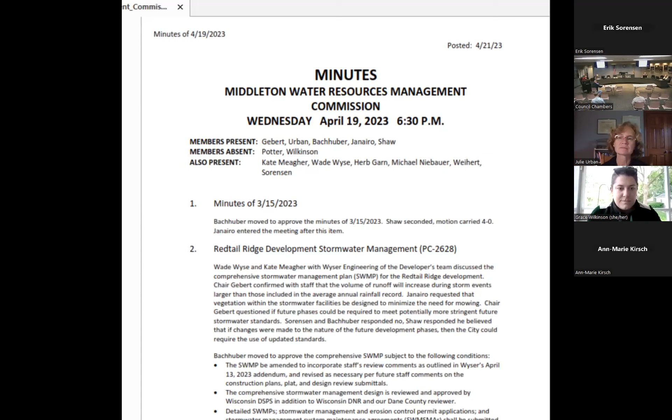The first item of business is the Rockridge Development Stormwater Management and a request for fees in lieu of. So Erik, you want to start an introduction?

Yeah, I'll give a brief introduction. This site is off of Pleasant View Road across from the golf course. Water Resources looked at it a couple of years ago for a different project, and then last April the developer came with a concept plan that you reviewed. The complicating factor with this site is that it's sitting on rock ledge. Water Resources had previously directed a diversion to Pleasant View Road and to not infiltrate into this sandstone bedrock. We did check with the designers for Pleasant View if the diversion would work with their storm sewer system, and they didn't see any negative impacts really at all, so we didn't have to upsize any sewer or the downstream pond for that.

Is your mic on, Erik? I have a hard time hearing you. Is that better, Warren? I don't think it's on. I can hear him, it's on, okay, it's not loud. Is this one better? No. We're having a hard time here. I'm not sure that it broadcasts up here. It may not. Well, it ought to be working, but what I'm most worried about is that the remote listeners can hear. You're coming through well remotely. All right, I'll just talk louder, or try to. Somebody's perhaps got a mic on. It's me.

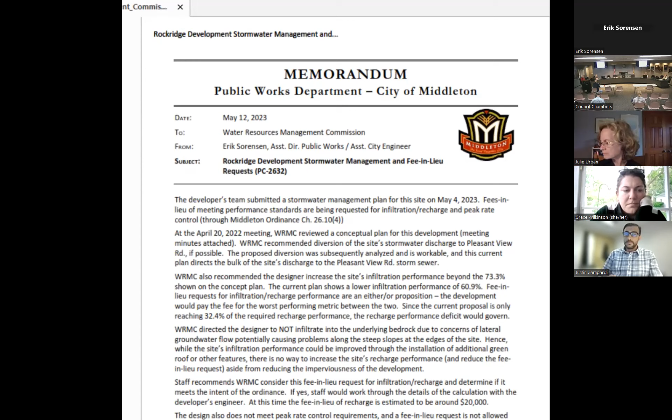Justin Zampardi from Vierbicher is here, and he can present this plan, I think, and talk about what's changed a little bit and what his constraints are with the design.

Good evening, Justin Zampardi with Vierbicher. Am I able to share my screen with you? You can give me 1 minute. Ken's here. Oh, you can. All right, Justin, you should be able to share.

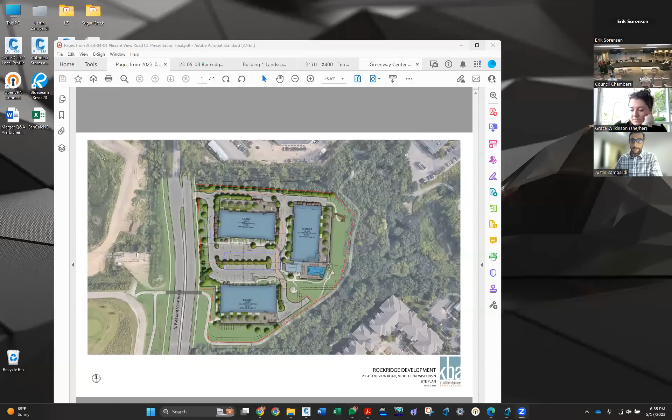Hopefully everyone can see the colored site plan on the screen. So overall, the layout is very similar to what we had before. We've got 3 buildings on the site, each with underground parking, and the underground parking actually extends out beyond the actual building footprint, so that's where we're planning to do our green roof area. In regards to our site layout, we've got one large underground stormwater management system in the middle of the site under the parking lot that's treating the majority of the site, and then we have a secondary system toward the front entrance picking up a lot of the perimeter drive along the north and west sides of the property.

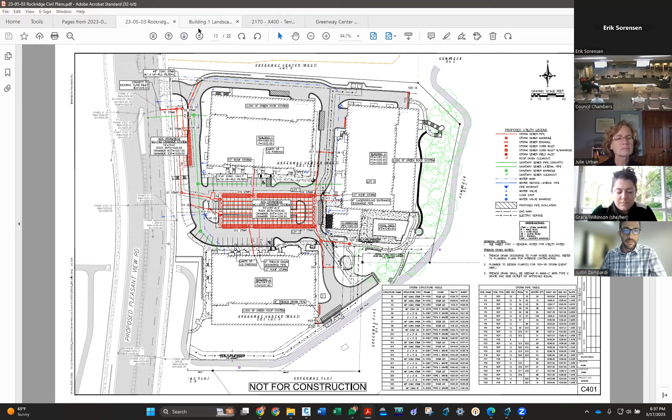Some of the reasoning for the decrease from our concept layout is really just further design of the buildings going through our approval process. I do have a typical rooftop area highlighting some of the green roof areas we're showing because of the width of the building and the area. There were some building code issues requiring us to provide a secondary access off of these areas, which is why we had to reduce some of the green roof area footprint in order to get an access out off the upper patio space area.

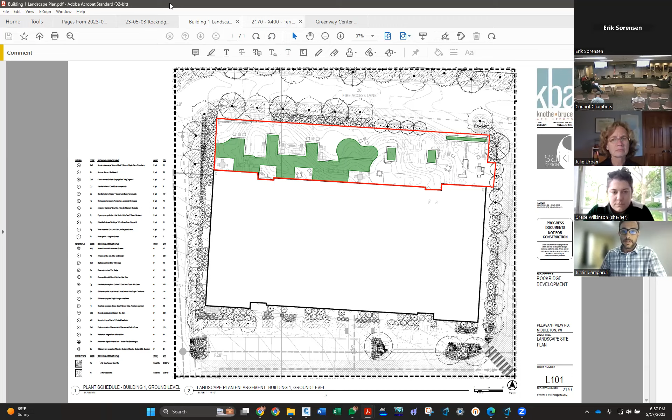As Erik mentioned, our site is approximately 5 acres. With the diversion, we're capturing around 3.9 acres of runoff and directing that into the proposed storm sewer in Pleasant View Road. The areas running off-site around the perimeter, hatched in red, are the steep slopes, existing steep slopes around the perimeter that just aren't feasible to capture. All those areas are primarily green space. With that, I'll leave it up for any comments or questions you may have.

One question on infiltration - you didn't try to make any attempt at infiltration. The previous site we talked about was a single building in the center, and they had an infiltration basin off towards the north, close to that sheer wall. That's the one we thought might present some problems, but this is a different configuration, and it looks like you made no attempt to do any infiltration. I really think you should at least show us some infiltration potential before we make a decision.

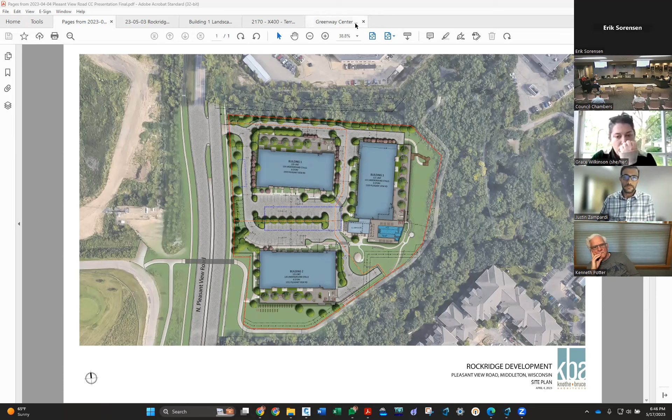And on the peak flow issue, I'm not understanding that. I didn't delve into this terribly deeply, but on top of page 13 of the report is a peak flow post-development summary table.

What we were trying to show in this table is the captured area that we highlighted in that report was 3.89 acres, and our post-developed flows running through our stormwater facilities are essentially meeting the pre-developed rates for that captured area.

What the rest of the table is showing is that for the perimeter around that area, which we're not able to capture, that is this 'no controls' column. And if you were to just strictly look at the 5 acres in total from pre to post, the table is showing that we're not meeting that.

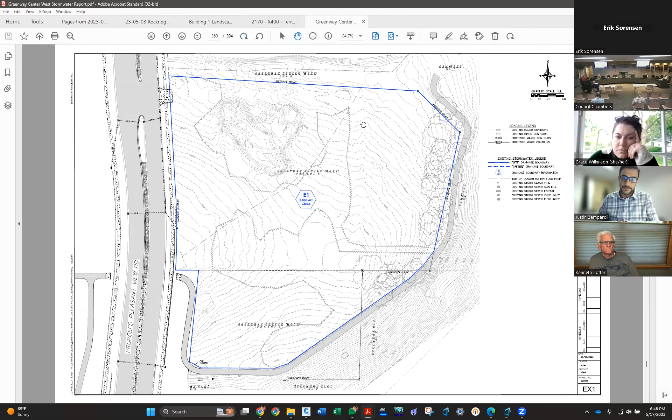That really ends up being a time of concentration issue, and just the peaks of the storm are different when you look at the map for the whole site. This has a longer time of concentration running off as opposed to the same grass area that has a shorter length. So it shows an increase in flow, even though it's the same pervious grassed area.

So really, we were kind of looking at it from the standpoint of the area that we can capture, this roughly 4 acres, we're running it through the stormwater system, and we're matching or reducing peak flows on that.

And then the green space perimeter is running off undetained. And really, this 4 acres is also a diversion from what is currently going down the hill offsite to neighboring parcels, being reduced down to roughly 1 acre.

Erik, when this water that's going into the new Pleasant View system, that's going to then flow north to Highway 14 in a storm sewer? Do you know where it goes from there? It flows north to Quarry Road, and the Pleasant View project is building a new basin on part of the co-op property, just upstream of South Pond. Oh, so it'll go through there, then to South Pond. Okay, so it goes into South Pond eventually.

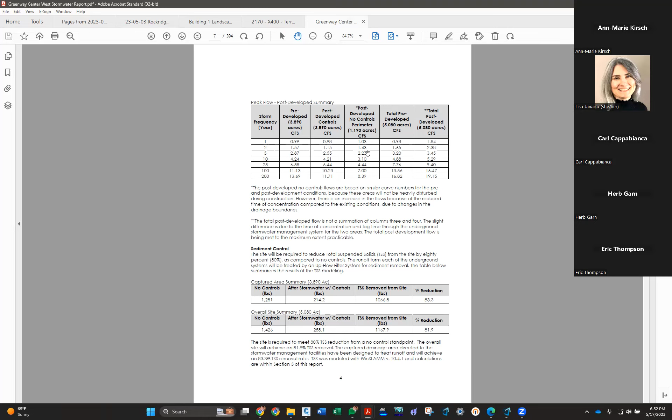So the motion would be to request the developer to submit plans to DSPS for infiltration on the site, and also that they reanalyze the system to meet the peak flow requirements from the entire site, not just the currently treated site. That would make sense to me.

I guess before we continue, I believe we had the same discussion last meeting, and I think ultimately we came to the resolution that infiltration was not good for this site, and that's why we're seeking the exemption. So I'm curious why we're going back on what we already decided. I don't think so, because I've raised the same concerns before. Our only approval was on the previous design, and your design is different. So I raised the concerns about infiltration last time.

I think I must have misinterpreted that too then, Warren. I thought Water Resources had said no infiltration, not just no infiltration at the northeast corner. Is Ken having a thought on this? 'Cause I know Ken was involved with that discussion also.

Yeah, I think we need to get some infiltration, but you share the concern not along the perimeter areas. Is that what we're trying to say? Yeah.

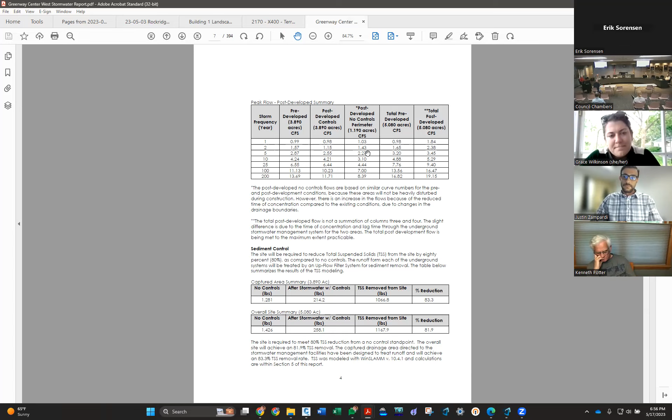Well, at least then we know for sure. Yeah, but you're making these guys do stuff that's not gonna get us anywhere.

The previous one was ready to go ahead with infiltration, except for being close to the cliff with lateral flow. So I don't understand what the difference was from their design versus this one. The only reason we said we're concerned about it is the basin was located near that cliff and they're worried about lateral flow, and we don't know what design they may come up with here. All right.

If the commission wants to vote to do that, that's fine. I'll just be a minority vote then. That's all right, I can live with that.

So you withdraw the motion you started to make then? I can still vote against my own motion, I guess, can't I? Sure, yeah, someone's got to make the motion. I could do the motion in my name with your wording that you had. All right, go for it.

Can you capture that wording again, Eric? Motion is to deny the request for peak rate control fees in lieu and to defer a decision on infiltration fees in lieu until the developer comes back with an answer from DSPS. They should make an attempt to do infiltration where they can. It may not be able to be done for the whole site, but maybe at least partially.

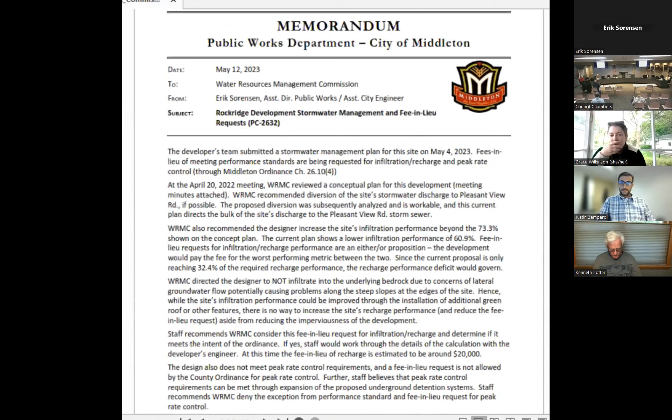Well, we have a motion right now. Is there a second? I'll second. Okay, we have a motion on the table. Is there any further discussion or clarification that's needed? I would like to propose that if we don't vote this to approve, that we would separate out the two issues and vote on the peak flow versus the infiltration issue separately. But you got to second it, so you got to take a vote.

Okay, all in favor of the motion, say aye. Aye, aye, aye. So that's 2 in favor, opposed? Nay, nay, nay. Okay, so the motion fails. You want to try and separate them?

So the first motion is to read the first part again, Eric: to reject the peak flow fee in lieu of request. Yes, that's about what it is, right? So that's my motion. Second. Is there any further discussion or clarification needed? If not, all in favor? Aye, aye. Opposed? Aye, aye.

What was the count? 3 and 2. I'm not sure how Ken voted. I'll support it, yeah. Was that Herb that voted no remotely? No, I voted in favor. Oh, okay. I also voted in favor. So that's 5-1 is what I get. Okay.

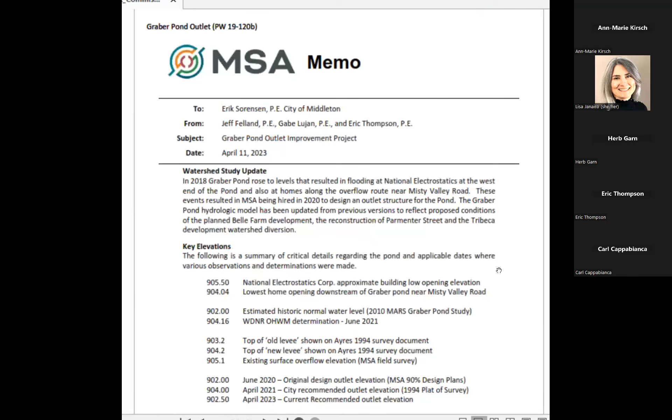Good evening, everyone. As Eric said, I'm Jeff Felland from MSA. I'm here to provide an update on the Graber Pond Outlet design project.

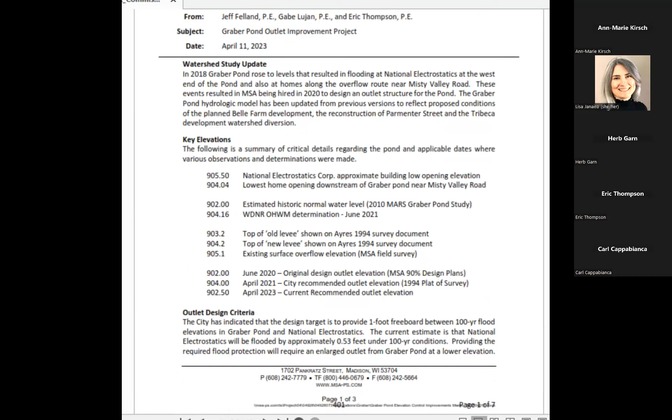Eric provided a brief background of where we've arrived at today. The latest memo, or bit of work that we did and wrote up a memo for, as Eric mentioned, was to look to create the freeboard at National Electrostatics, and then also at the houses along the overflow path from the pond upstream of the Misty Valley Road culvert crossing.

One important thing to note in this process is that back in June of 2021, DNR set the ordinary high water mark at 904.16 — that's the elevation they determined the ordinary high water to be at.

So in this last round of work, we were modeling under the boundary condition of having that Graber Pond starting water surface elevation equal to the proposed outlet elevation of a structure.

The other things incorporated in this last effort were some updating of our model based on the proposed Belle Farm development, the proposed reconstruction of Parmenter Street, and then a diversion of an area referred to as Tribeca that would now go to a regional pond versus going to Graber Pond. So those were the conditions that changed from the last round of modeling.

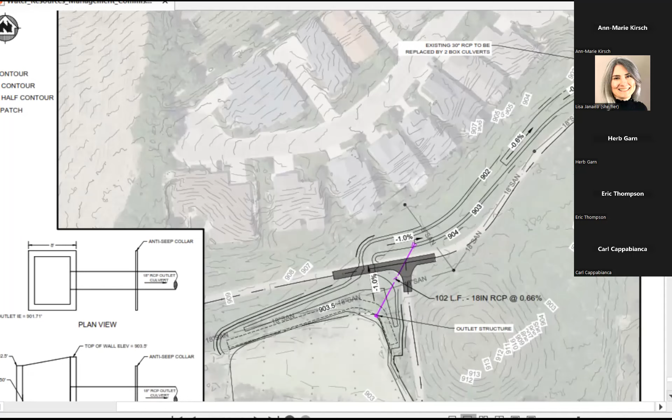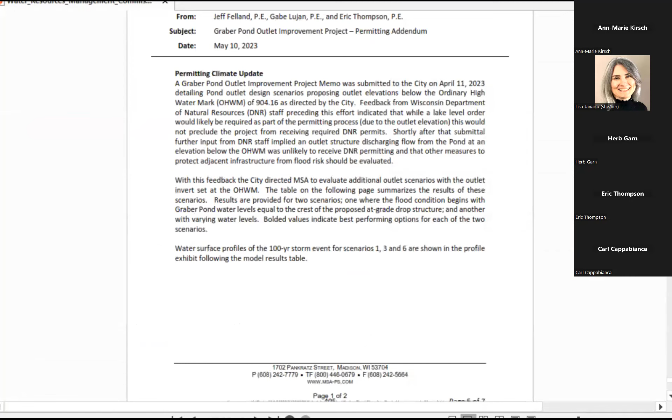After that process, DNR came back, upon some further nudging, to try to get a little more clarity on what the permitting requirements would be. They provided a challenging scenario for permitting an outlet structure with an invert elevation set below that ordinary high water mark.

So the discussion went from a lake level order likely being needed as part of this individual permit process for a structure below the ordinary high water mark, to the DNR saying they don't think a lake level order is the proper mechanism to evaluate this permitting application, and instead a public rights stage investigation would be more appropriate.

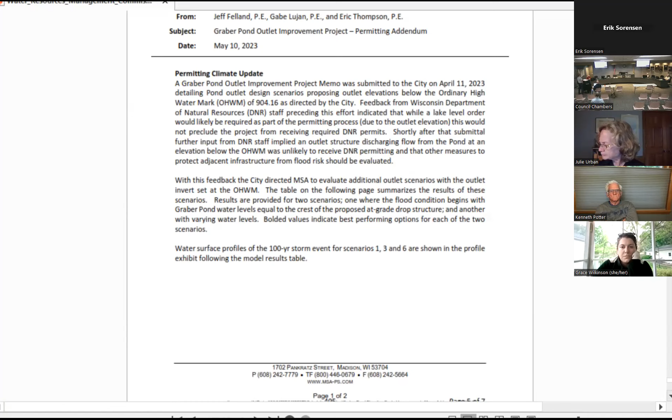Further input was that DNR traditionally has not allowed outlet structure invert elevations below an ordinary high water mark in natural or public water resources, i.e. Graber Pond or similar kettles. So this last round of input from the DNR regarding permitting doesn't paint a very great picture for the chances of a permit application for a project that proposes lowering the outlet from Graber Pond.

Is there a question or comment? Just to boil this down, because it's a complicated situation for sure, and I don't follow all this stuff either: if we were allowed to lower it below 904.16, we would then buy ourselves some storage to be able to mitigate, under some conditions, downstream high flow impacts. Is that right, or am I not getting this?

Lowering the elevation gets you some freeboard at National Electrostatics, but also dumps more water out of the pond sooner and potentially creates flood risk for the homes along Misty Valley. You could have a couple of feet worth of storage above that lower level, with a control structure that would store water temporarily behind a weir, but then you're going to put National Electrostatics at risk.

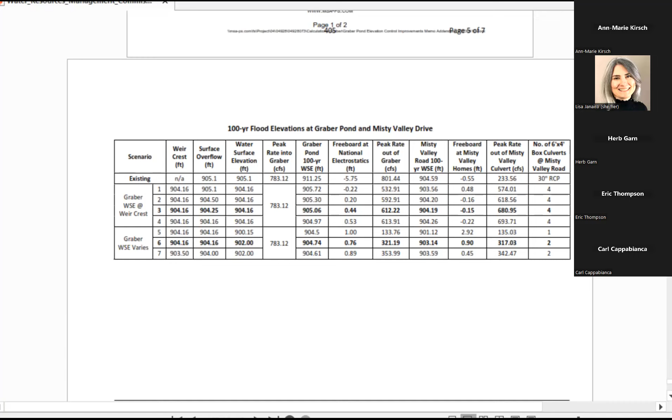That seems to be the sentiment conveyed from the DNR based on past precedent, even though this was a pond that at one time went dry—it's a kettle pond. I had the last correspondence with DNR permit staff, and the question I asked was, doesn't the historical manipulation of the outlet matter? He basically said no, but at this point I'm not certain I'm speaking with the right staff, or whether I should take the conversation up one or two levels higher.

Their reason for the 904 elevation is to preserve the wetland adjacent to it, to keep the water level up and protect that public resource. That's where they set the ordinary high water mark, based on the last couple of years before 2021 that were so wet, when it flooded and overtopped. I wouldn't call that the ordinary high water mark, but it is a high water mark.

I think it'll change over time, and that's what I'm trying to get across to them—that it's been fluctuating over time, perhaps through some bad decisions, and we've allowed it to lift up. At least that's the research I've found since I came to the city and started looking through the old files.

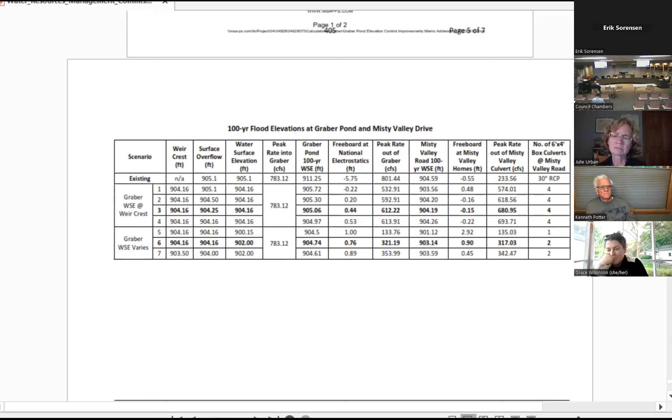Will this require an amendment? Put you on the spot. Well, I don't know that. I think we have probably all the information we would need to present a case or to further the discussion with the DNR.

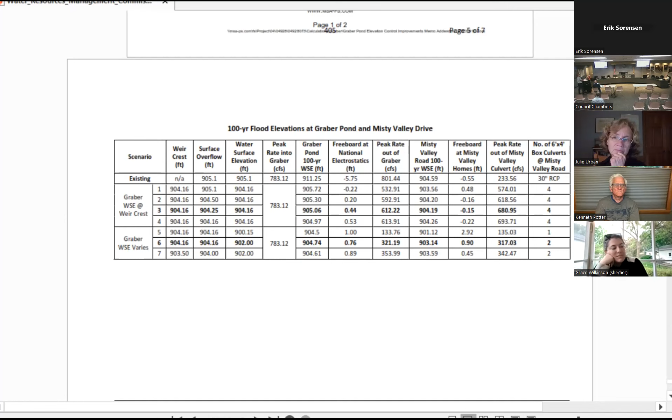You have budget to carry on right now, and this is part of your budget scope, although it's expanding now. There is some, I don't know exactly where the budget stands, but I know there's some remaining funds under this last amendment. I can look at that and get back to Eric, but I think there would be minimal effort from a modeling standpoint to come up with a couple more scenarios to present to the DNR if they were interested, but I really think the bulk of the effort at this point is in conversation and discussion with the DNR.

And maybe trying to flesh out a little bit more detailed history of the pond, and the manipulation or past historic manipulation of the pond outlet. I don't know how far you've gone with that information on historic conditions and elevations that were existing, and what the pond level is when it dries up — those kinds of numbers, if that would have any sway with our friends downtown, or Fitchburg, I guess.

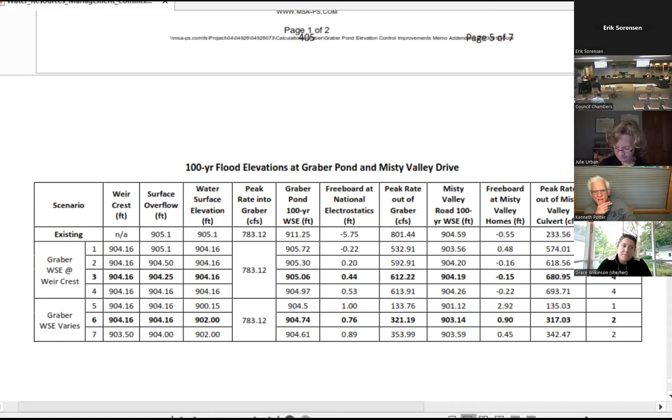Yeah, the way it was phrased to me is they set the ordinary high water. If we propose an outlet below that, you're reducing or lowering or shrinking the public resource. That fringe is no longer there, and that's where they got hung up — even though that public resource was only that high during maybe a 3-year period.

So if we do lower it, does it then become a dam, a storage reservoir? Is that different criteria? I don't think so. A few years ago, we did get a determination from DNR that it was not a dam. I don't see how it would become one if we lowered the water elevation, because certainly it's not built as a dam for retaining water — essentially dirt just dropped there.

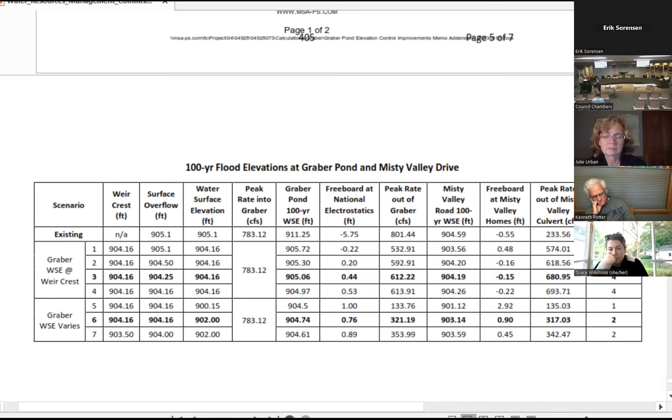No, I disagree. There are two berms in this northeast corner of the pond, and those were both, I believe, constructed by the farmer owner of this land.

I don't think that would qualify as dam construction given the type of soils and compaction that took place. But my point has always been that there's nothing natural about the outlet of this pond.

Those berms show up in the '94 Plat survey. Yeah, we've got some historic information. I'm going to have to look into that.

Going back to that previous slide that shows the different scenarios, which scenario would you want to see, Eric? Is that scenario 2? I think that's still up in the air. I think the more flood storage we can get, that's a good thing from a lot of different perspectives.

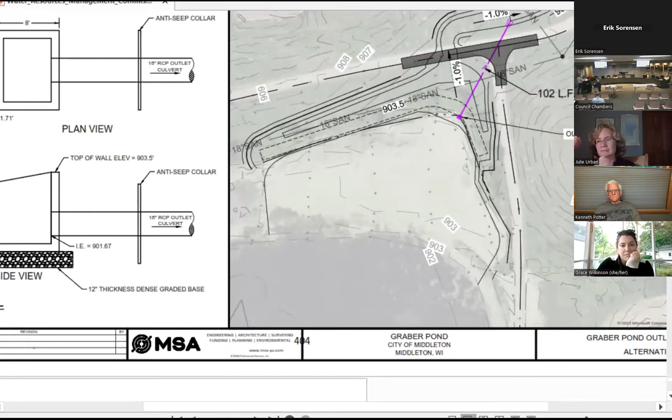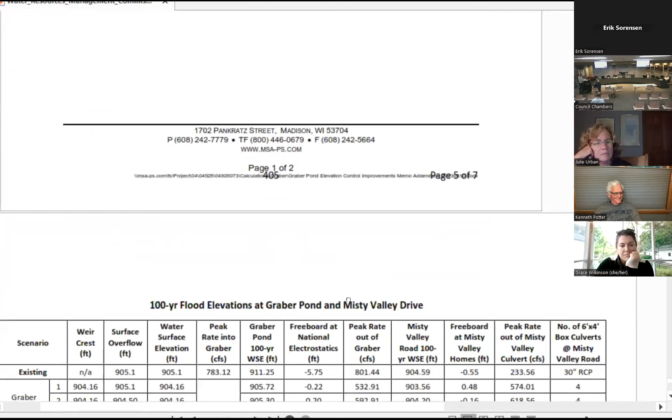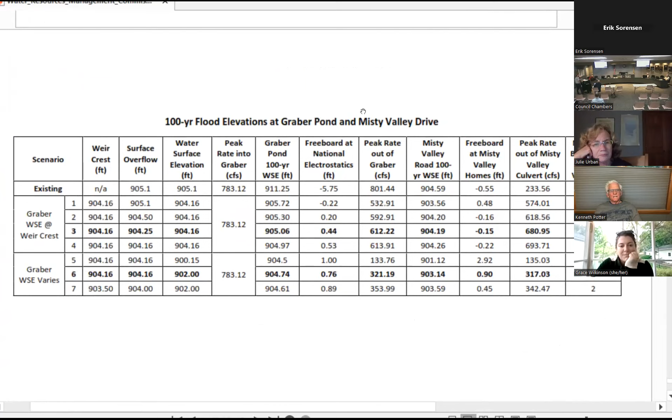So that was an application for a house that should never have been allowed. Agreed - it was cheaper to buy the house. Well, you know, home builders like exposed basements, and if you don't stop them, they build right in the middle of drainage ways or directly adjacent to them. If we'd had a floodplain study done at the outlet of Graber Pond years ago, I guess we could have prevented that.

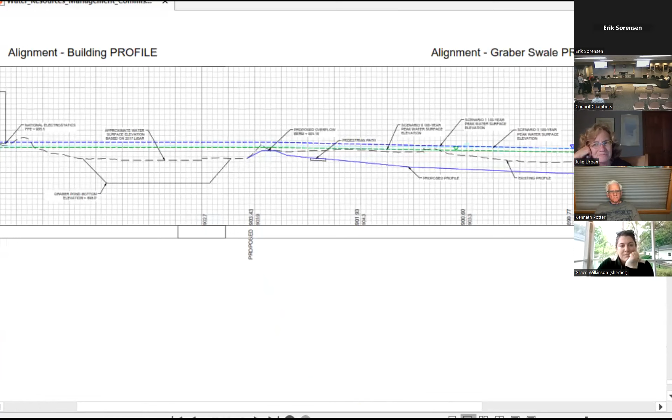So what more direction do we need? Anything? Do you need a motion from us? I don't think so - this was a status report.

I hear a consensus to keep trying with permitting with DNR and come back later.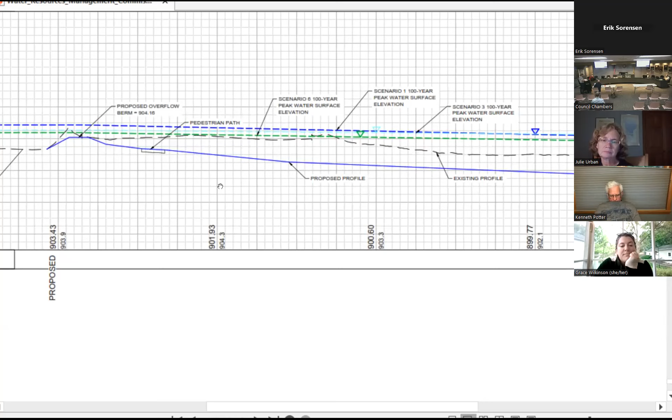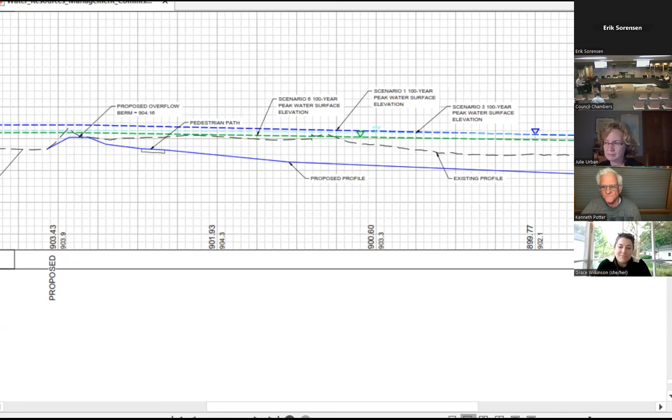Erik, I'll be in your... like you normally do. Yeah, sound, but it's not connected to that. I mean, that's the other alternative. I couldn't hear you, like connect through the internet and I would hear you sound like it. Yeah, you'd probably get feedback, I'm guessing, if you tried it. It would probably do that. Be delayed, maybe. Yeah.

How's the audio, Julie and Grace? Good on our end for me.

Okay, the next item is enhanced phosphorus removal, a proposal by Chuck Nahn and Associates. So Chuck, you want to make a presentation or introduce it, Erik, what we're looking at?

Chuck Nahn approached us with a proposal to look at an enhanced and exciting system to capture phosphorus within Confluence Pond, which I think we're all in support of. Staff's question is just whether or not the city should be funding this, and if it's been scoped well enough to take this first step.

Chuck, take it away. Yeah, so I'm happy to be here. My name is Chuck Nahn of Nahn Associates.

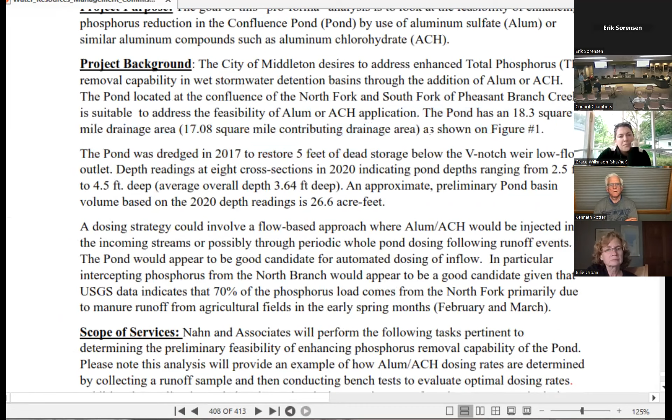We have these TMDL mandates looking at 85% removal of total phosphorus. Well, half of that is dissolved phosphorus typically, and half is particulate. Particulate phosphorus is removed in the detention basins, but the dissolved phosphorus oftentimes isn't. The other thing that intrigued me was that adding alum or other coagulants not only takes the phosphorus out of the water column, but also inactivates the phosphorus in the sediment below.

So I actually invited Richard Redapool and Kevin Connors to come out and look at some stormwater ponds here in Middleton that we could maybe do something like that with. We originally started at Lakeview Pond and looked at that. That turned out to maybe not have as big an area, not as much contact time.

Herb Garn suggested we look at the Confluence Pond. The Confluence Pond has a lot of good data from the USGS—10 years of overlapping data on dissolved phosphorus, total phosphorus, sediment, and flow. So it's a really good area to compare and see what we're looking to do as far as alum injection.

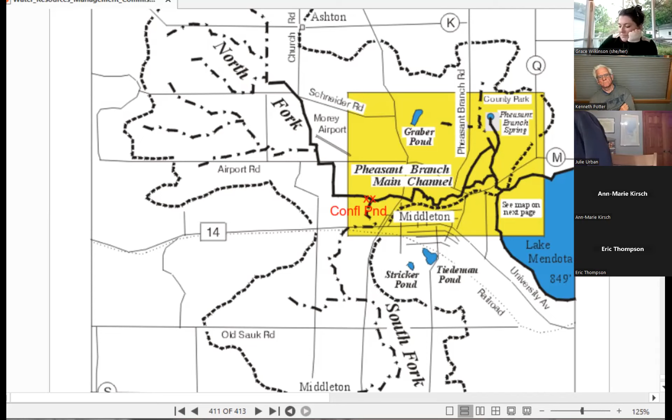That's great, Chuck—your procedure, how you're going to dose it, and how during a storm you'll anticipate it coming, or once it's there, start putting the dose into the stream, and then collect samples at the outlet. This will show what improvement we have in phosphorus reduction.

Yeah, I got a little ahead of myself. Looking at the dosing strategy is actually a next step we'll be looking at. Right now the scope is just to look at the data analysis and get an idea of the mean residence time and phosphorus loads, and then do jar tests of both ACH and alum on three separate storm events.

We would actually work with the USGS. We talked to Todd Stuntebeck about possibly utilizing some of the samples they gather for their analysis—they could maybe give us some to do this analysis for our work.

So this study wouldn't show whether it works or not—it's just a matter of the procedure being tested? Sorry, no, it would show. Basically we're looking at adding different amounts of alum to different samples to get to that 90% removal, and we'd come up with the right formulation of how much alum we need to add to remove that phosphorus to reach that 90% level.

But you wouldn't take samples at the outlet to see whether it was a removal? My understanding is the USGS already monitors phosphorus—total phosphorus and dissolved phosphorus—at the downstream station, and they have two upstream stations as well. So that's already being looked at; we don't see any reason to do more monitoring since they're already monitoring that.

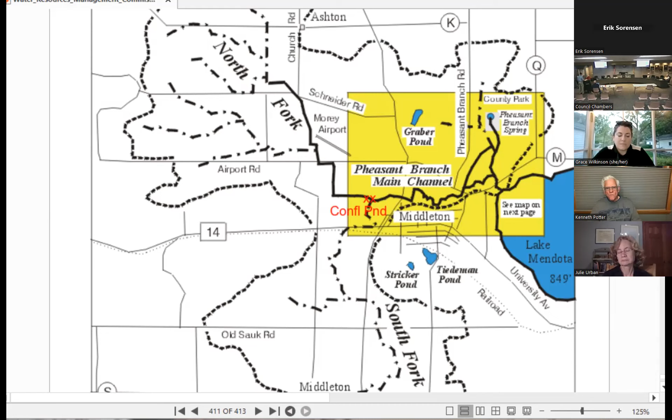You're right. I think certainly Dane County has come out with the top 10 contributors of phosphorus into Lake Mendota, and I think we're number 2 with Pheasant Branch Creek. And it really is a situation where it is all coming from those ag fields up in this town of Springfield, and it is coming in those critical spring months, just those two months. So if we can have a focused approach to attack that, I think we'll be solving a lot of the issues. But Jim, you're right, there's a lot downstream of there before it gets to Lake Mendota. But at least we'll be eliminating—that's all urban down there.

Yeah, it's all coming from the ag fields of the town of Springfield. I'm trying to draw the analogy of what's been done so far in Dane County with these two ponds, Verona and Alliant Energy Center, is not what we're talking about here. Correct. Yeah, the big difference—apples and oranges—is that was an application, and we're talking about a dosing site.

And the reason, if you've ever walked around the pedestrian path, there's 3 culverts. They're like 3,000 feet upstream from the V-Notch Weir. And there's a lot of good contact time there that would allow us to get a lot of good phosphorus removal by adding alum at that site.

So there are some issues, Warren, about the dosage and whatnot that we have to work out. We're just saying tentatively, just looking at it, that seems like a good place to start, but that's not part of this scope. This scope is just to do jar tests and to analyze the USGS data and present a result back to you guys.

And results back to us would show how much you would take the USGS data and show us. I think what you would show is with these coagulants, alum, ACH, there's other ones too, at these concentrations applied to the runoff that came off from North Fork, it reduced the phosphorus by X over 24 hours or something like that. Correct. It's not going to show us what comes out.